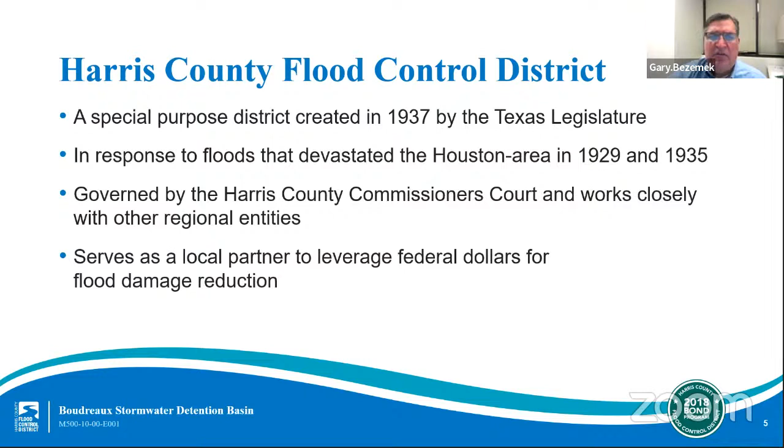The organization was created in part to serve as a local partner to leverage federal funding for flood damage reduction projects. Our mission has expanded since our founding, leading to billions of dollars in federal, state, and locally funded infrastructure improvements in the ground. The Flood Control District's mission is to provide flood damage reduction projects that work with appropriate regard for community and natural values. One of the most difficult challenges we face is constructing effective projects that are sensitive to community and natural values in a highly urbanized area.

Harris County includes 22 main watersheds, totaling approximately 1,800 square miles and more than 2,500 linear miles of channel. 2,500 miles is approximately the distance from New York to California. A watershed is a geographical region of land that drains to a common channel or outlet. Each watershed has its own unique characteristics and needs. The project we are presenting tonight is in the Willow Creek watershed that is located in unincorporated Precinct 4 of Harris County.

Why is Harris County flood prone? Well, our area is flood prone for several reasons, and here are some of the reasons why. Our area experiences extreme rainfall, including tropical storms and hurricanes. Our area is very flat with slow draining land, and our area's underlying soils are clay soils that do not soak up excess rainfall quickly.

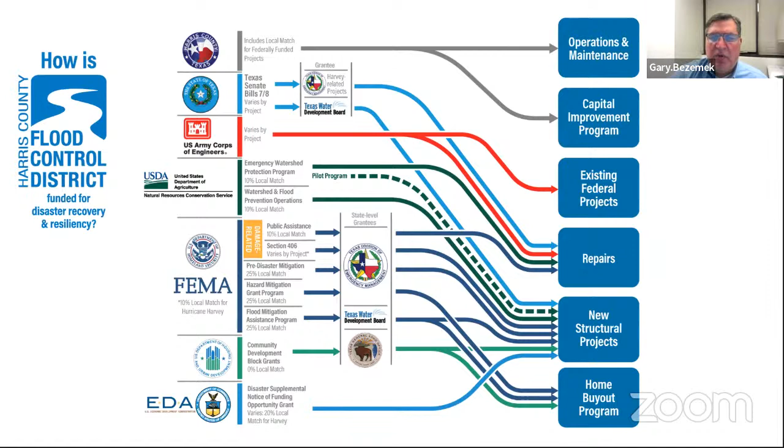While the bond was for $2.5 billion, the full cost of every project on the bond table is almost $5 billion. So we made it clear from the outset that we would need funding partners to fully construct the projects in the bond program. As I mentioned, we have had some successes so far, having secured more than $1.35 billion in partner funds. This graphic illustrates the many sources of those partnerships, including federal, state, and local funding that the Flood Control District is working to secure for Harris County. Each agency has its own definition of eligible projects and its own requirements for local match funding. So the Flood Control District works diligently to match projects to the right partnership opportunities.

We will now move into the part of the program that is specifically about the Willow Creek watershed and the Boudreaux Stormwater Detention Basin project. I want to first give a brief overview of the Willow Creek watershed and a recent study of this area. The Willow Creek watershed is in the north region of Harris County. It is mostly unincorporated and it includes the southern portion of the city of Tomball. The watershed area is approximately 54 square miles, which includes 56 miles of open streams. The eastern half of the watershed is forested, but includes portions of significant development. The western half of the watershed is primarily rural with open pasture land, but it is developing rapidly. The watershed has a continual history of flooding.

Earlier this year, the Flood Control District completed the Willow Creek Watershed Planning Study, which looked at flooding issues across Willow Creek watershed and recommended projects to reduce flooding risks. Planners for this study worked with Harris County, municipalities, and other agencies to clarify flooding issues and to improve coordination between Flood Control District regional projects and future local projects. Out of all the major flooding events over the last several years, Hurricane Harvey caused the most damage in Willow Creek watershed, with more than 500 homes flooded in this storm. The watershed study determined that the best strategies for addressing flooding issues in this area included selective clearing of trees and other vegetation from Willow Creek, multiple stormwater detention basin construction, and floodplain preservation to prevent further development in the floodplain.

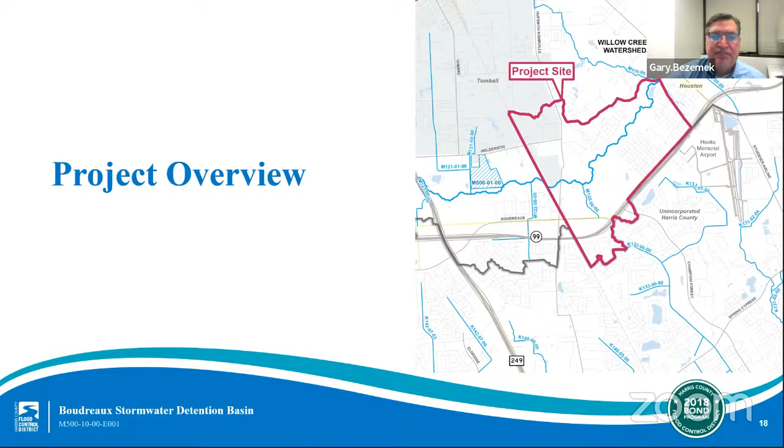Each alternative allows for potential partnerships with other local entities that may wish to build recreational amenities such as trails. While the Flood Control District does not build these features, we do coordinate with entities that do, so that when possible, our facilities can support both flood risk mitigation and recreation. Many factors go into deciding what type of stormwater detention basin to build at a particular site, including the amount of the available land, environmental constraints, and many other factors. I will note that the alternatives for this project have not been finalized, nor has a recommended project been developed. That will come later. As a reminder, the purpose of this first meeting is to share background information on the project so far and gain feedback from you.

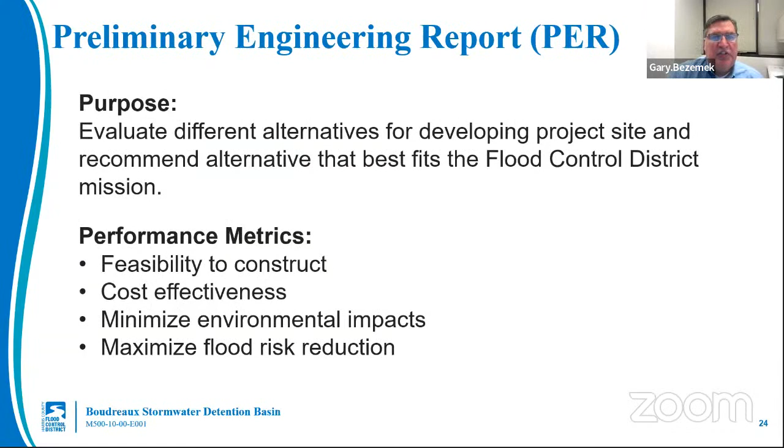Thank you, Zafar. Our next question will be for Gary. How much will this project reduce flood levels in the Willow Creek watershed? Yes, the project is expected to reduce flood levels. Well, I should add that this project that we're talking about, as a reminder, is the detention basin near the Boudreaux Road area. But from the flood control district's perspective, it's being done in combination as part of a bigger plan that also includes the selective clearing that we talked about.

So when the selective clearing and the detention basin are put together, based on our feasibility study, we were seeing reductions at the 100-year event, which is around 16 inches in 24 hours of rainfall over the entire watershed. We were seeing reductions anywhere from 3 inches to about a foot at the 100-year. And our expected benefits are somewhere on the order of 100 to 150 homes that would be pulled out. They would no longer be at risk to flood during the design storm, that 100-year that we were evaluating.

A lot of other homes, there's several hundred, would experience reduced flooding if they would flood at all. So depending on the elevation of the homes, they're all going to experience either a benefit or be removed from the flooding. But we're looking at somewhere in that 100, 150 number of homes, and flood elevations dropping anywhere from 2 to 3 inches at a minimum within the study limits to about a foot.

Thank you, Gary. Next question is for you as well. Can you describe more about what a stormwater detention basin looks like? Yeah, if we could maybe go back to one of the graphics. We call them a detention basin. Smaller ones may be called ponds by others, but basically it's an excavated area that is designed to fill up and hold stormwater. There's different ways these basins can be designed in terms of what they look like.

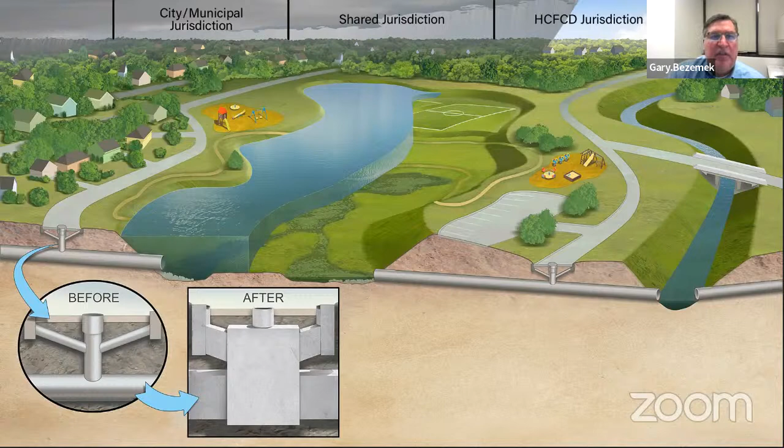And as a reminder, the plan that we've developed for Willow Creek includes multiple detention sites. It's just at this point in time, we're starting with the detention basin that scored the highest. And so our long-term plan would be to build additional stormwater detention and design it so that we can reduce the flooding and the flows when you have these extreme events over the entire watershed.

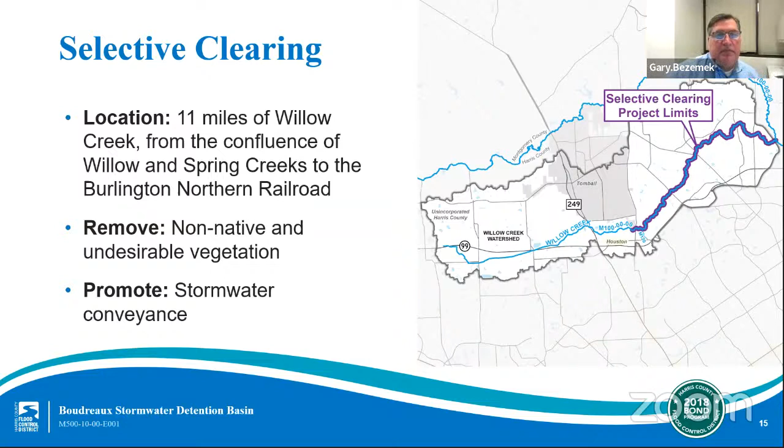Thank you. Next question will be for Gary. Gary, how is this project being funded? The basin design, the PER for the M500-10 basin, is totally being funded right now out of our 2018 bond. There were two bond projects that were listed that we're going to be able to take funding from. One of them is bond project number F-106, which was $15 million to do construction and design activities in Willow Creek.

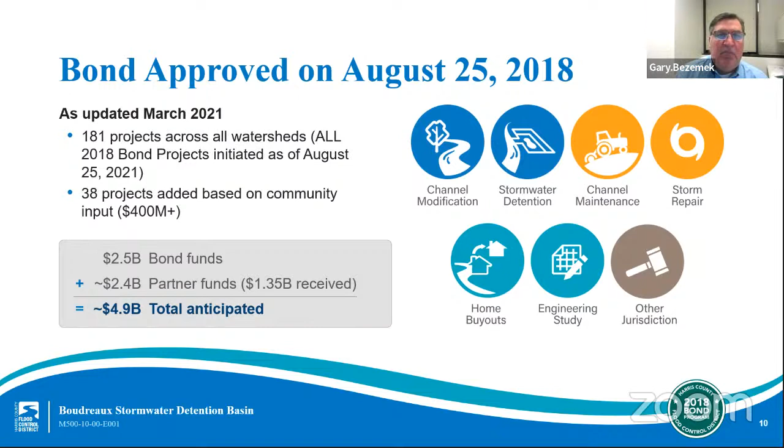And we also have bond project F-36, which was a $30 million bond project to acquire property, detention basin sites, for either detention or floodplain preservation. So between the combination of those two bond projects, we're going to be able to fund a good portion of this. I don't know if it'll pay for all of this project, but it should be a good portion of it to get us started.

Thank you, Gary. Next question is for Zafar. Do you know whether this project will pull areas out of the 100 or 500-year floodplain? Well, it is still too early. We are at the preliminary engineering stage. We'll know during our final design about the exact benefit of the project.

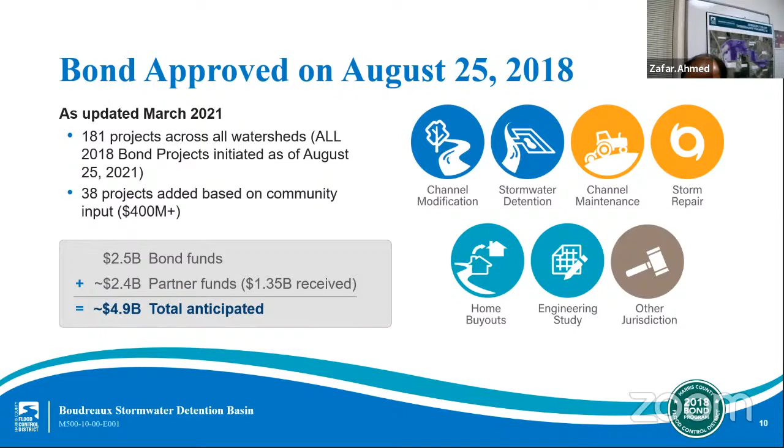And we are gonna see the full benefit after completion of this project and the selective clearing project, and also a couple of other projects the feasibility study recommended along the Willow Creek watershed. So this project alone is gonna reduce some flood risk, but we don't know the exact benefit yet. We are gonna have a clearer picture during our final design stage.

Thank you. Next question will be for Gary. How will you mitigate the environmental impacts of this project? Yes, really the way that we do that is we first have to start with identifying what the project will be. So there's sort of a combination of things going on when we're doing the PER.

One is we're identifying what the project is so that ultimately we can take the project and apply for whatever relevant permits, environmental permits we have to. But the second thing going on is while we're designing it, we're keeping in mind what the impacts potentially would be to the environment, and we're trying to minimize impacts through our design.

So as we're working through the PER, we're gathering information about wetlands, habitat that lives out there, vegetation, all the different things. And as we work through that process and we gain more information, then we have to make decisions on, hey, is the site that we were thinking about at the beginning, would we still want to build the basin the way that the feasibility study laid it out?

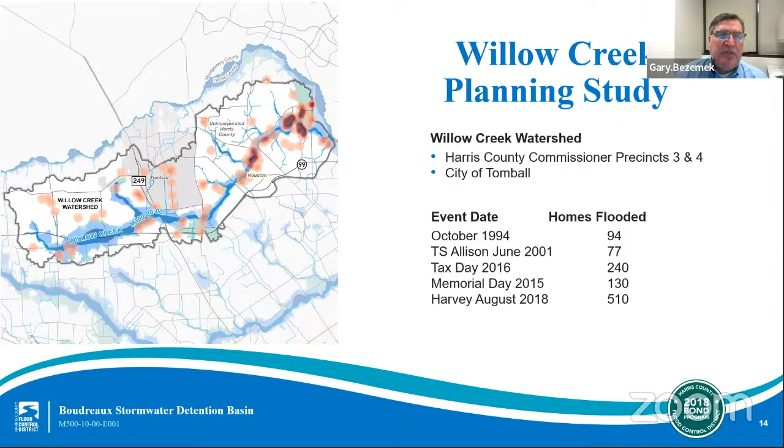And then ultimately what we do to mitigate is when we go for the permit, if there are certain elements of the environment that are being damaged, we have to work out how we would mitigate that. And there's a lot of different ways of doing that, mitigation banks, tree plantings, things that we do on the back end of the project. So all of that is part of what goes into the PER process.

Thank you, Gary. Next question is for Zafar. Why can't you show the exact location for this project? Well, as we have discussed, this project is at the preliminary stage, and during the preliminary study, we are going to study 3 alternatives to meet the project benefit and goal. And based on the 3 alternatives, we are going to recommend the best alternative based on our study and the estimated cost and benefits. So at that time, we are going to know the exact footprint and alignment of the detention basins.

So currently we know the general location of the project is located to the north of State Highway 99 and Boudreaux Road and along the Willow Creek main stem and in unincorporated Harris County. So during our second public engagement meeting, we should be able to share the exact location of this project. Thank you. Thank you, Zafar.

I think you all mentioned alternatives. Why are there multiple alternatives and how do you decide? Is that for me? Yeah, for you, Gary, or Zafar. No, I can answer. Really, it starts at the feasibility. And when we talk about alternatives, Zafar's alternatives are maybe a little bit different when we're in the PER process than when I'm referring to an alternative at the feasibility study.

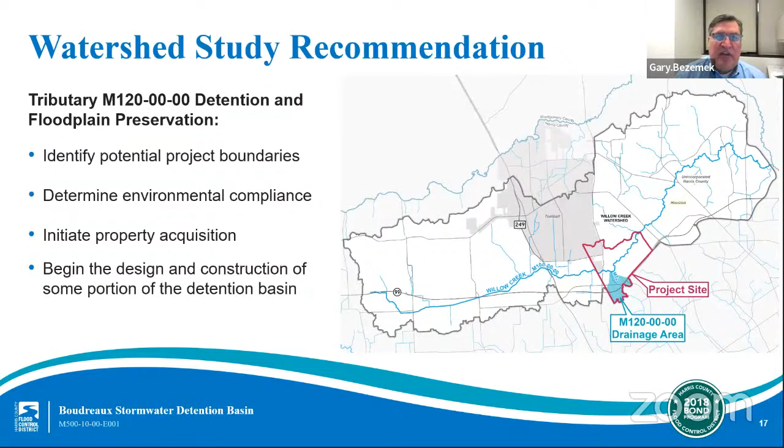And so, when we talk about an alternative in the PER, it's really a design element change, or it's a, how can we avoid this environmental constraint? And they come up with various alternatives, kind of like what we did, but their alternatives are variants of a concept of a project. And then ultimately they will come up with something that they would recommend. And then that project, if blessed and there's funding, would continue to work its way down the process, ultimately go into design and then construction. So hopefully that kind of gives an idea of what we're referring to when we talk about an alternative.

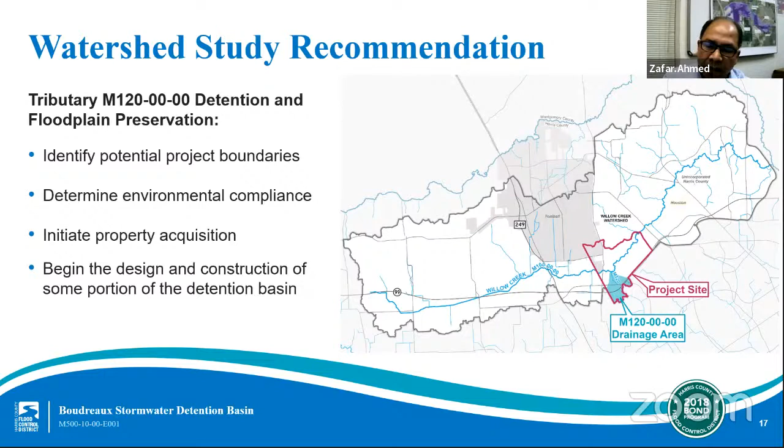And for Zafar, will the public have a chance to see the alternatives and give their input? Shanda, thank you. Yes, our next public engagement meeting is going to be tentatively during spring 2022. And at that time, we are going to have our draft PER with at least minimum 3 alternatives and the recommended alternatives. So at that time, during our meeting, we are going to ask for public input, and we are going to incorporate those public comments, recommendations, and revise our draft PER and finalize it, so the answer is yes.

Of course, we are gonna share alternatives and the recommended alternative with the public, and also we're gonna seek public inputs and advice. Answer is yes. Thank you.

Thank you. Gary, will M500-10 take overflow out of Willow Creek or some other channel? Yes, as our feasibility study progressed, the biggest pervasive problem that we were seeing within the watershed was flooding along the main stem of Willow Creek. So as conceived and laid out in our feasibility study, the M500-10 basin would predominantly be taking overflow water out of Willow Creek main stem and diverting it into this detention facility. And so in doing that, it reduces the amount of flows going down Willow Creek, which directly relates into a lower floodplain, a smaller floodplain limit.

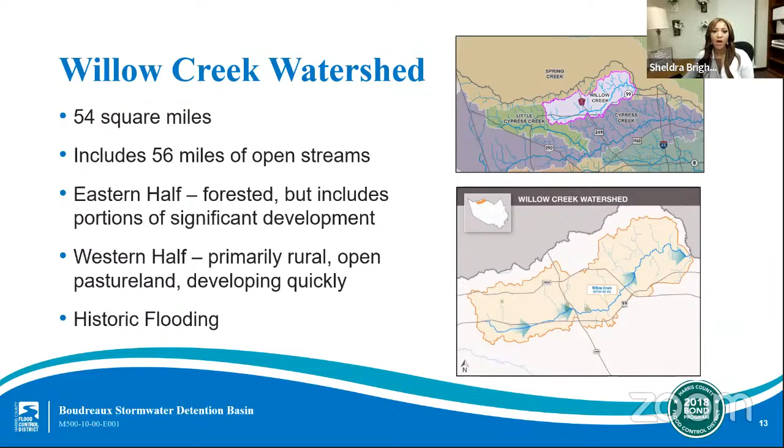A stormwater detention basin, I think in a very simplified sense, when you get a large rain event, where the channels are filling up, that rainwater as it runs off through the watershed is picking up debris, it's picking up contaminants like oil, anything that was on the road. And so the best way to get that out of the water is to slow the water down and let it sit for a while so that that material can settle out.

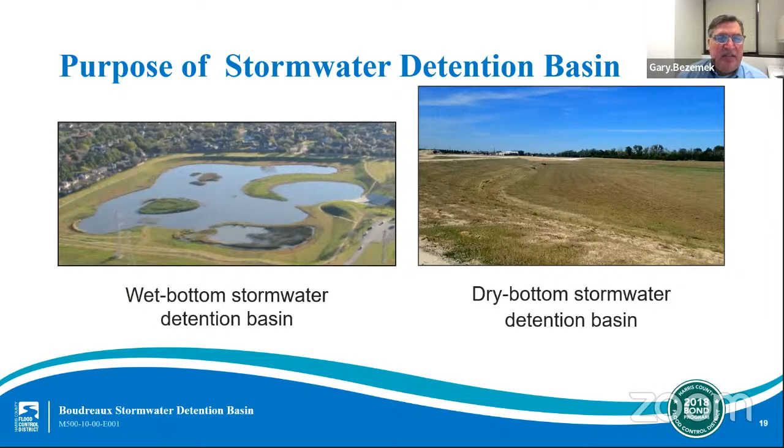So the purpose of a stormwater detention basin with water quality features typically is to have a path that the regular rainfall, the 2-year, 1-year, will be able to get into an area where it will sit for enough time that everything in it can settle out. And in conjunction with water quality plantings, there's plants that we can put into the bottom that will help clean up the water. It takes out some of the oils and those type of things.

And so there's an entire side of the engineering that's trying to design based on what would be in the water to put in plantings, wetland plantings, those type of plantings in the bottom of the basin, and then have a contact time where it stays long enough that that water, when it comes out of the basin, is going to be cleaner than what actually went into it. So that becomes something that we try to do.

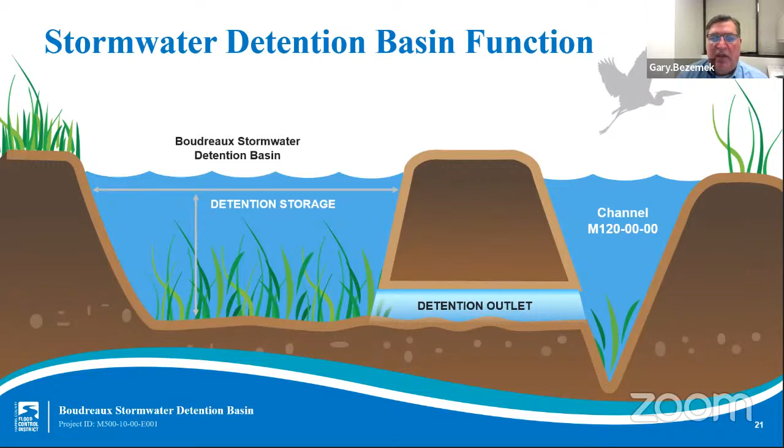We typically don't do that at the feasibility stage because that's starting to get into a lot of little details. When we're doing feasibility, we're trying to figure out what the project would look like. But as it gets into PER, that's where they start really looking at those details about what could be done and what would it look like and how does that affect the functionality of the basin itself.

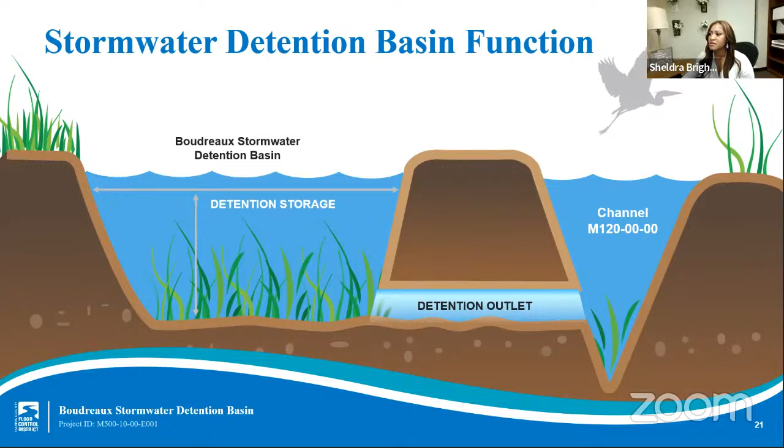Thank you, Gary. Can you talk about any other projects recommended by the Watershed study? Sure. The overall study that we completed recommended, I don't remember the exact number, but it was 4 or 5 detention basins be built along the main stem of Willow Creek that are within the limits of the selective clearing.

So we evaluated what it would take to reduce the floodplain, and we came up with a plan where, in conjunction with the selective clearing, that will allow for more flow to go through the channel. It's kind of restoring the channel capacity back to what it once was. We would also add the detention in.

So once we came up with the overall plan, then we had to go back and say, okay, if we just build one basin at a time, what are the individual benefits of each basin, to try to figure out which basin would perform the best and give us the most benefits, because that's the basin that we want to build first.

So the other projects are conceptual, but they're detention facilities that would be built along the main stem, and in conjunction, they would reduce water elevations to the maximum target that is laid out in our study.